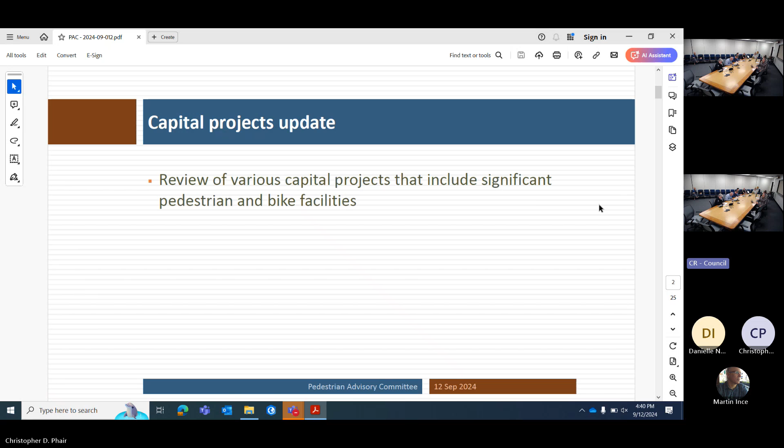All right, first one is the Lone Tree Overpass and Corridor. A lot of different components involved. It has a budget of $105 million and an anticipated construction schedule from FY24 to FY26. The project includes separated bike lanes on both sides of the overpass and roadway, and a FUTS trail on the west side. It includes a protected intersection at Butler and Lone Tree intersection.

And there are planned connections on the south and north to FUTS trails. The south would connect to NAU campus and the north to the future Switzer Canyon FUTS trail.

Quick question. At the last meeting, somebody talked about trying to acquire some land with a big gravel yard. Have they made any progress on that? I went and looked at it and it's a big piece of land. What you're referring to is one of the big holdups on the project, trying to relocate a light industrial facility, a concrete batch plant. It's on the city to find them an appropriate place to relocate to, and that's what has been holding the process up. As far as progress, I can't speak to any. Martin, any idea? No, I don't know.

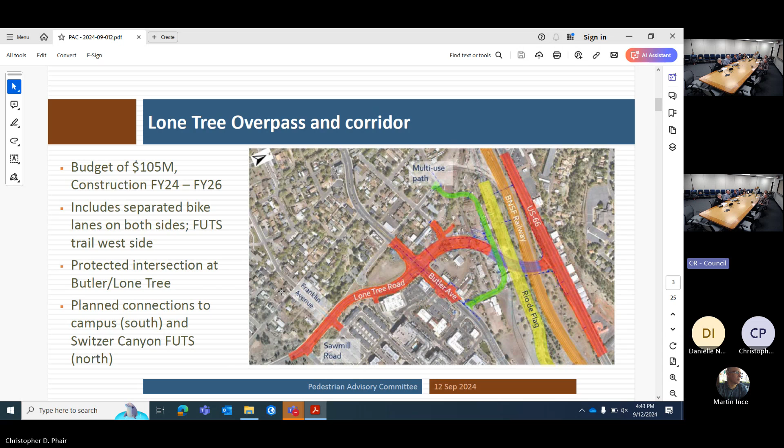So we could go across 66 and connect up to the Switzer Canyon Trail. Once that's in place, you can go all the way to Buffalo Park just by crossing two streets from that point. Going down south, that's a connection to the NAU campus. You can imagine how that will improve connectivity for people in those neighborhoods and going to campus as well.

Going back to when this was originally planned, we had talked to the Ped and Bike Advisory Committees about that trail because we were planning off-street bike lanes, which could replace the function of that trail. But there was interest in having that trail connect because of how it links to other trails in that area, keeping that link in place between Route 66, possibly Switzer Canyon, all the way down to campus. A bit further down, that solid orange line is the Sinclair Wash Trail, so in that part of town it forms a really nice connection between all of those things.

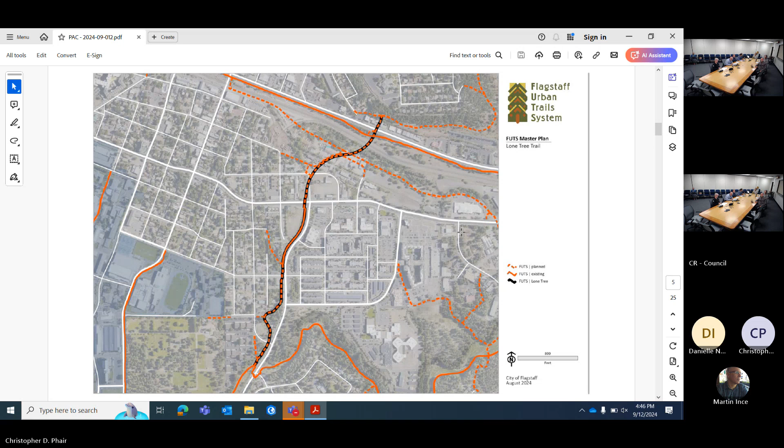Okay, next is the Butler Fourth Corridor improvements. This project has a budget of $16.4 million, with construction anticipated between FY24 and FY26. It includes separated bike lanes on the north and south sides of Butler Avenue.

Two roundabouts will be implemented, one at Herold Ranch Road, and one further east at Butler and Fourth. The one at Herold Ranch is being designed specifically to handle truck traffic because of the truck stop there, and we run into a decent amount of issues with conflicts from trucks trying to make a left off the south side. So this roundabout will force, with median islands as well, trucks to make a right out of that truck stop, go around this special roundabout to get back to the interchange.

And then another roundabout at Butler and Fourth. There's also the possibility of a tunnel for a FUTS trail at Butler and Fourth. The extent of the project goes from east of the I-40 interchange right to around where those truck stops are, and will extend east to the Sinagua Heights area, past the Butler Fourth intersection a ways.

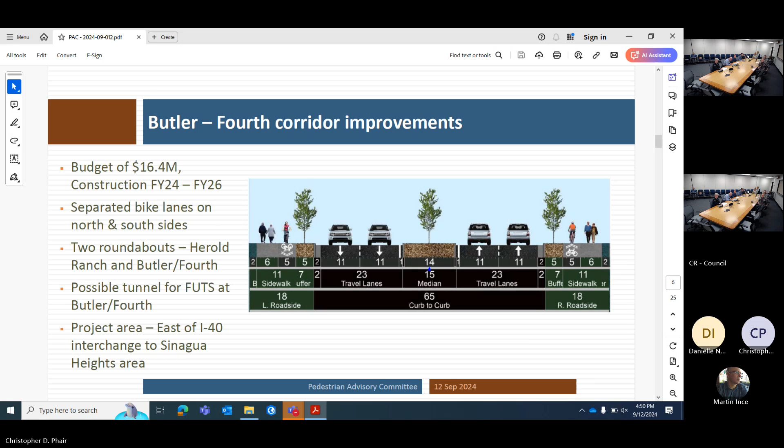It also includes separated bike lanes through the Milton underpass, and that's a big keystone of the rest of the project - expanding the railroad underpass that Milton Road goes underneath, adding a third rail and expanding the right of way beneath that. I think we have some more graphics to really exemplify that.

I think that the Rio de Flag underpass, the one downtown, the trail won't just end into the parking lot - it'll actually go around and end at the intersection of Phoenix. I just plan to drive there, park, and then take the trail. And that's the appropriate public park usage, yes.

I'm curious about this one and the Lone Tree Overpass - the Lone Tree Overpass does not depend on a BNSF stoppage, is that correct?

They're going to have the trains running the whole time, but for this project, it seems like them being willing to stop the trains for any period of time for construction is just... the schedules go on and on.

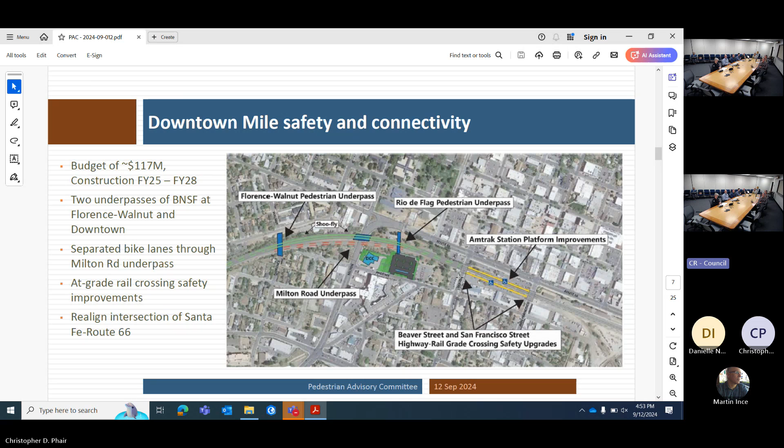And the bus people will be able to have better access to making their turns. They seem to have a lot of difficulty getting in and out of the Phoenix, on and off of Phoenix.

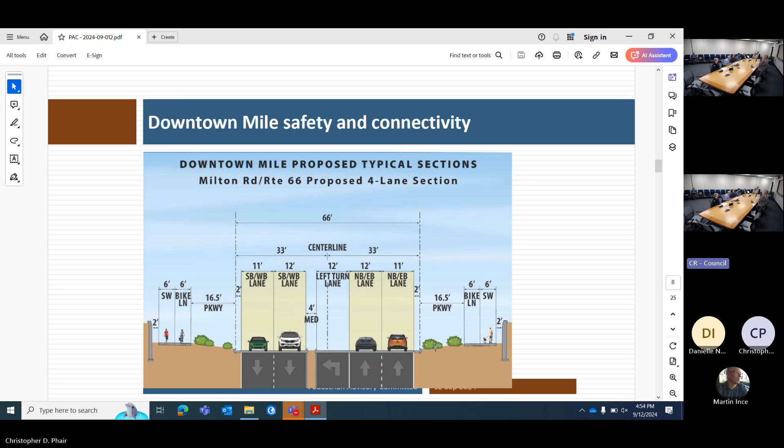Still TBD. I think they had argued at ADOT for a traffic signal at that corner, and the answer so far has been no, but that may not be the final answer - they may still be working that out. They're brave bus drivers.

So really the same issue that Mountain Line has with access in and out of Phoenix is not dissimilar to pedestrian and bike access. When you think about this stretch of 66, the closest formal crossings that are signalized are Beaver and Butler along that stretch.

This doesn't really improve that in that it doesn't introduce any additional crossings, but the two underpasses will help off to either side with getting pedestrian and bike access across the tracks into and out of downtown.

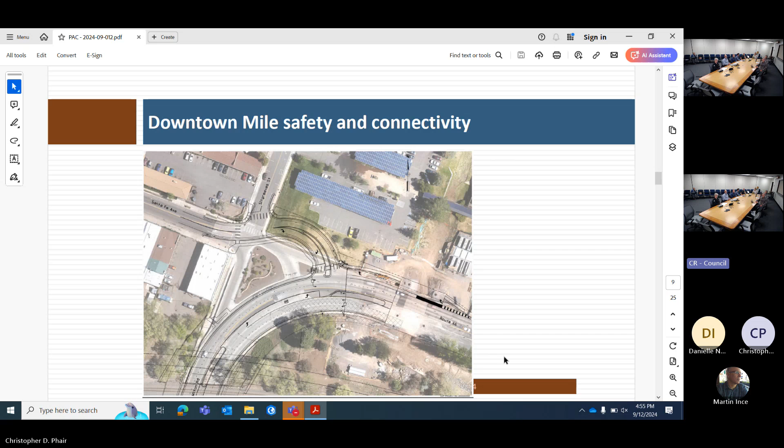All right, any other comments related to this one? Great.

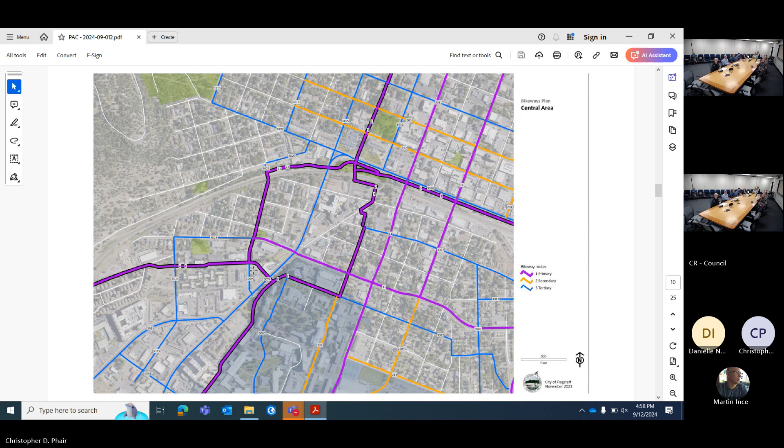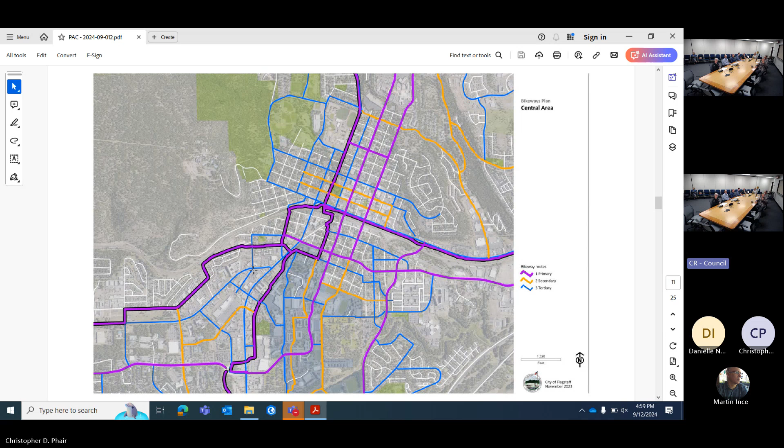This is just a bigger picture image of that same map, connecting all ends of the city, or attempting to connect all ends of the city.

All right, next project for discussion: the JW Powell Boulevard extension. This project has a budget of $45 million and a planned construction period of FY25 to 26, subject to change, I would add. The project extends from the existing end of JWP and heads east and ultimately north to connect with the Butler Fourth intersection at that south leg we were discussing before.

We're anticipating ped-bike edge improvements throughout the corridor, and there's a number of realignments related to the Arizona Trail that Martin will take us through.

So just to get oriented, this diagonal line across here is I-40, and toward the north end, this is Butler Avenue. Here's the interchange, here's the other project Chris talked about at Butler Fourth. So really we're talking about this whole area south of I-40. The main road through here is JWP, which connects from where it ends now by Pine Canyon, all the way through, and comes out at the intersection of Butler and Fourth.

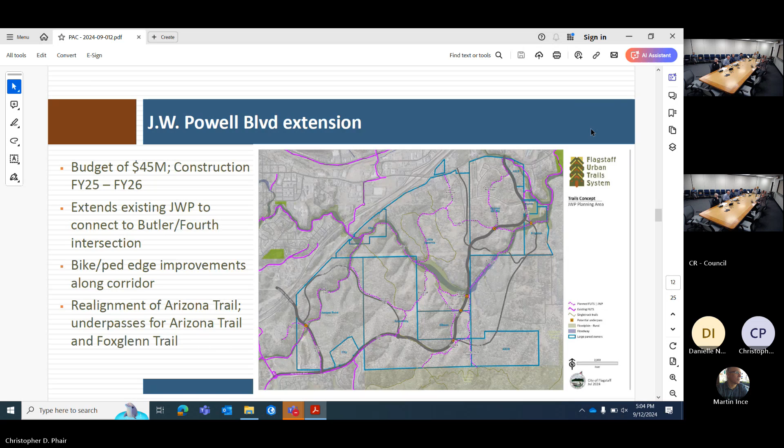Next project, the Rio de Flag flood control. This project has a budget of $122 million and construction is expected between 2025 and 2030. The project buries the Rio de Flag in multiple locations to mitigate and manage flooding in heavily impacted areas, especially through the core of the city.

The project will also work to extend the Karen Cooper Trail past City Hall to Phoenix and pave it as you head north towards Bonito.

A couple of interesting components of this project related to burying the Rio. As far as I understand it, it largely follows its current alignment, but they will dig up the existing Rio and put a big culvert box underneath with a closed cap. That is what will hold the big flooding events. However, they're still going to maintain what you'd call a spillway, where you can still see water when the Rio is flowing, but it's much more managed to maintain some of the character that it adds to the city.

Do you guys have any other comments related to that? Hopefully they'll make that culvert big enough. They're the engineers, they're sharpening their pencil. I hate to be... yeah, yeah.

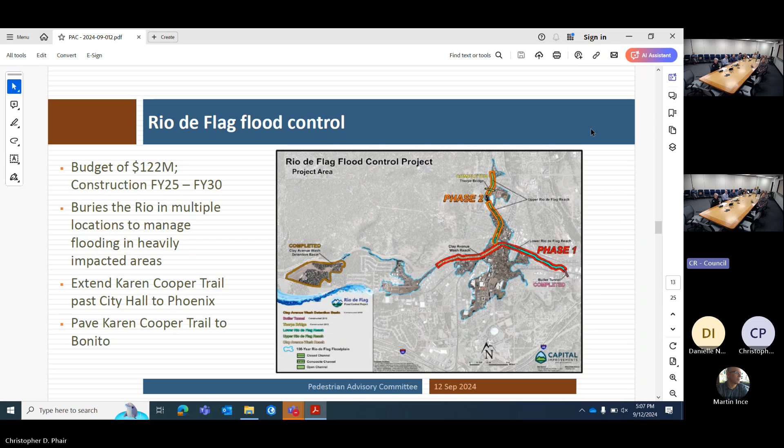Any other questions related to this one? Right.

Last one on our list for this agenda item, the Beulah University Roundabout. This project has a budget of $24.3 million and construction has been expected FY23 to 25. I'm sure we've all seen this ongoing work or been impacted by it.

The project provides separated bike lanes along the east and west side of Beulah, which you can see through this, how Beulah has been extended towards the north to reach this intersection. So separated bike and pedways on both sides, and raised pedestrian crossings at each leg of the intersection. Also of note is the pedestrian underpass of Milton Road, aligned right around this area, if you can see my cursor.

Halfway in. Yes, it is halfway. Yeah, it's going. Don't turn it back now. I hope not, yeah. Once you get past halfway, they're like, yeah, you gotta finish it now.

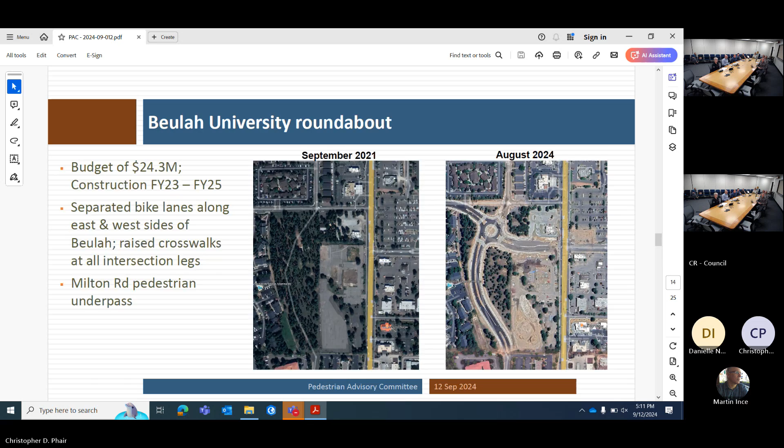Any other comments related to this? That's the end of that agenda item.

I know we've talked about these projects piecemeal over time, but we thought it was a good opportunity to bring them back and let you know the status, and give a refresher or update on what pedestrian and bicycle facilities we're planning as part of it. If you had to bet when that JWP to Fourth would be done, what year are we looking at? 2030?

Let's assume they start construction next year, probably the year after that, or the year after that. So next year is 25, so 27, summer of 27, optimistically.

Development's moving in that area aside from the Little America. Yeah, those guys will drive it faster than the city probably can. You look at what they're doing over there by Fourth, there's all new roads put in, you're like, oh, look at that, I'm sure they help pay for that. Cause only one side's developed, you'll see the developed side has all the bike stuff, the other side's just forest. They're like, yeah, I'm paying just this side, that's good.

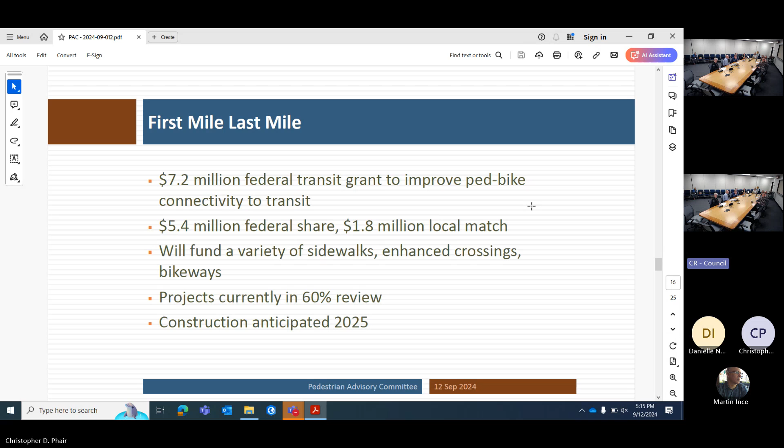What about the one? No one ever disagrees with that one. I was like, I just looked at that the other day in the morning. My God, what about the Lake Mary one?

There'll be another crossing. The first transit stop on Lake Mary is right across from the gas station there. Yes, so there'll be a crossing there. That is excellent.

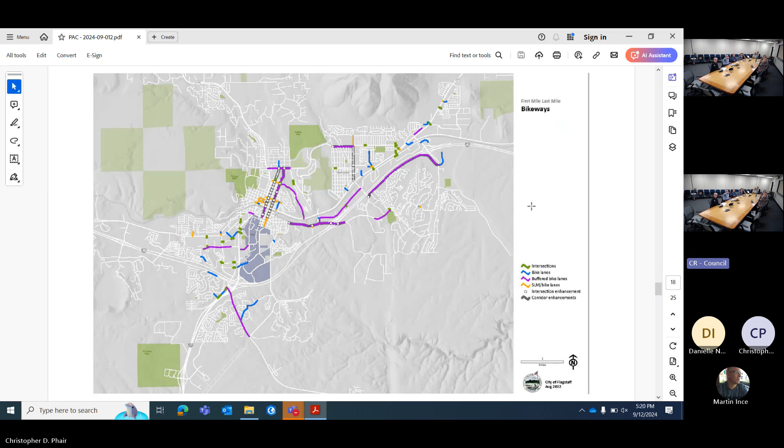The other one I think is maybe worth pointing out, kind of interesting, is Sylvia could be a buffered bike lane. If you go back to the crossings, we show enhanced crossings at every place there is a transit stop. I was wondering what those were connecting to. There's like 3 or 4 of them along Sylvia.

Yeah, it's not to give access to the interstate. No, it seems like there's a field there, maybe some wildflowers. So each one of those is a transit stop, and in this case the enhanced crossing would just be an island in the middle. There's room for that, Sylvia has a 2-way left turn lane that's pretty continuous.

And it's a useful bike route, which is why we identified it for potential buffered bike lanes. It's also a really fast street, and we're hoping that the islands and narrowing the feel of it through a buffered bike lane will help slow speeds. I know someone who ruled out that section of town entirely for moving there because it was just so miserable.

To try to get back and forth on a bike. So it'd be nice to have that place be open to bike commuting for normal people, not for the super commuters. I think this one will be interesting, how much it moves the needles for bicycle comfort and accommodation, because that's not one of our typical main bikeways in town.

But it could be really important for everybody who lives in that area. And further out, at the north end of the neighborhood, there's a lot of apartments, a lot of people. Yeah, because I ride out that way, but I have to go through where you're going to build those roads, just cobble together trails, private property. At night you get lost. Gas stations, detention basin, somewhere out there.

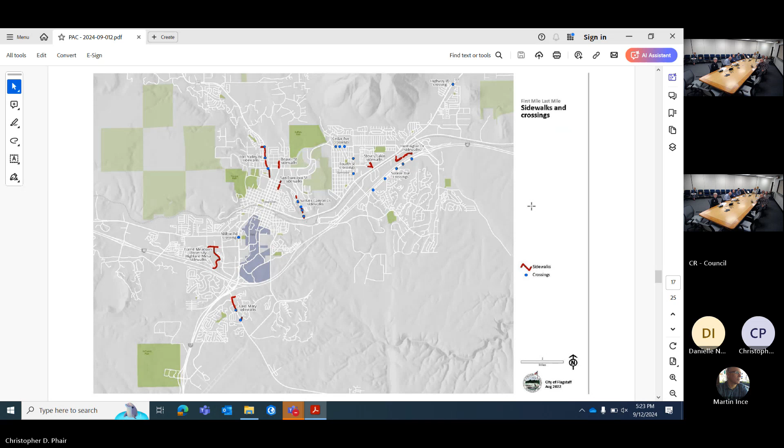Moving along, the Safe Streets for All Butler Avenue Complete Streets Conversion Project, one we've talked about many times before. In FY '23, the city of Flagstaff was awarded $9.6 million from the Federal Highway Administration to reconstruct Butler Avenue with complete streets design features. This includes separated bike lanes along both sides of Butler Avenue, from Milton Road to Sawmill.

Additionally, the project will enhance the existing RRFB crossing at Humphreys Street and Butler. As it stands now, the beacon lights are on the left and right sides of the road, but through the enhancements, it will install a mast arm so that the lights flash up directly over the tops of the roads.

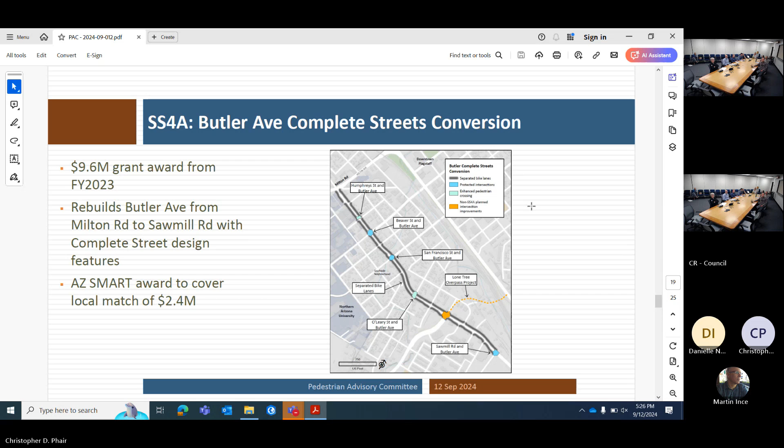Yeah, just a cross section of what will be typical throughout that project area. You can see separated bike paths, parkway space in between the roadway and the bike paths. What is subject to change depending on right-of-way constraints with this design is the parkway, which will be what gets eaten up. This right-of-way is 100 feet left to right, but there are some areas that are more constrained.

Now, the travel lanes, are they currently at 11 and 11 and a half, or are they going to get more narrow? It's a good question. Martin, I think that's pretty close to what they are now. They seem pretty narrow now. Yeah, that really works to slow people down, I think, at least me.

I think it varied depending on where you were, but they were as much as 12 feet through some sections, and with the original pilot barrier project, they got narrowed a little bit. So generally what's there now will match what will be there. And the extension of the curb, what is an on-street bike lane now will become the edge of curb. So it will work to make drivers feel a bit more constrained, and is a geometric change that could help slow people who are driving. Yeah, they don't see that open space.

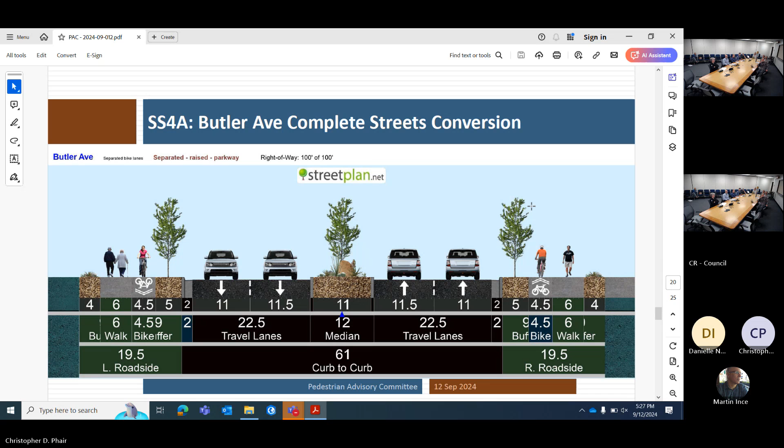We all set here? Right.

Next, the Active Transportation Infrastructure Investment Program, that's the name of the grant. The project is the Santa Fe Milton FUTS Bikeway. This was a fairly recent topic. The PAC offered a letter of support for this grant application for $509,000.

It would work to create concept level plans for 3 high priority projects identified in the ATMP. Those projects are the Santa Fe FUTS Trail Extension, which is this western leg that extends to the West Flagstaff neighborhoods. In this map, the green is the existing FUTS network, and the gold is this 3-legged project that would work to fill a missing puzzle piece of the active transportation network.

So ultimately, the Santa Fe FUTS Trail to the west, the Milton Bikeway which would extend down to the south, and then the Milton Road Ped Bike Bridge, which would span the two bikeways in question from the eastern end of the Santa Fe FUTS Trail across to the Milton Bikeway, across Milton Road, somewhat near the existing Jack in the Box to NAU campus on the eastern side of Milton.

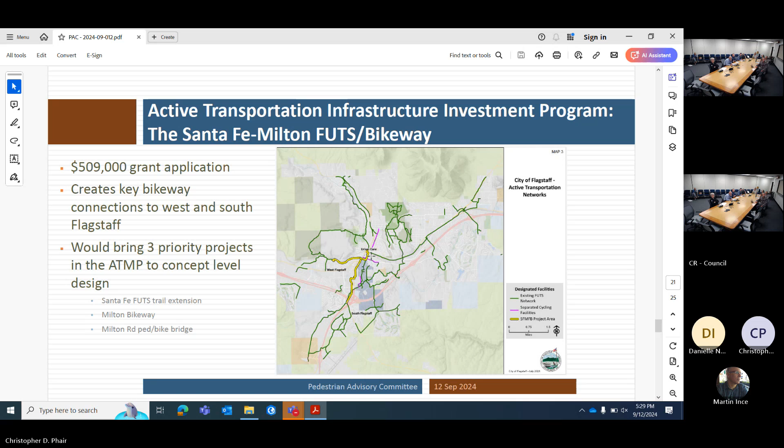Updates related to this grant: it was submitted back in July. Hopefully we will hear back sometime, somewhat timely. I'm anxious for this one, I had a lot of skin in this game. Yeah, hopefully by November or December we'll be likely to hear back on this one. Good. All right.

And then a few others: the SS4A Safe Streets Master Plan. This was an application put out earlier this year. Metro Plan, the city's MPO, led the effort on the application portion of this. Ultimately, the city had approximately $500,000 to $600,000 budgeted to create its transportation master plan, and to capitalize on available federal funding through this Safe Streets for All program.

Metro Plan suggested that we work together to leverage that $500,000 into more money. So we put out a $2.4 million grant application, and that was awarded. This plan, work is going to get underway on it soon. We're expecting to reach a grant agreement sometime in November. And I assume that it'll be a topic that comes back to PAC many times before it's done.

Otherwise, the Safe Streets for All amendment to the ATMP concept planning project, that was the most recent grant application that we submitted. PAC also provided a letter of support for this one, so we've discussed it recently. This would provide the city with a $1.7 million grant award, and it would allow us to get a contractor or consultant on board to bring a slew of our high priority ATMP projects to roughly 15% design, or to develop concept plans.

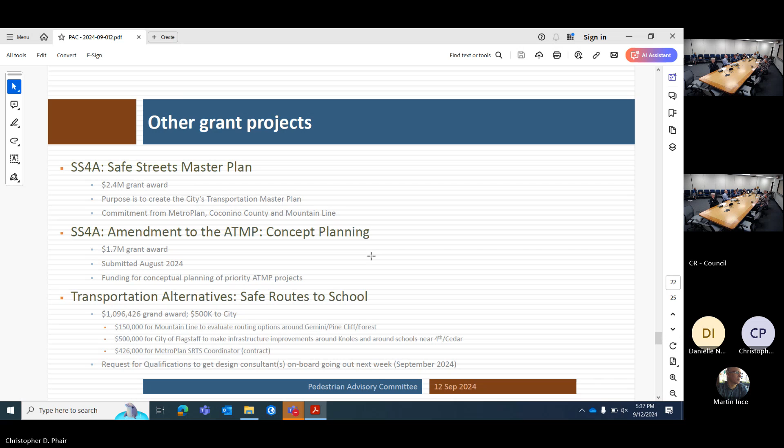Okay, moving on. The last in our triumvirate of updates is on safety studies. And here I'll turn it over to Chris again, but the theme is there's a handful of things going on at different levels: the city, the region through Metro Plan, and the state.

You'll be involved at various levels in all of these processes, and we're doing this to give you some context to see how all these things fit together and what their intent is.

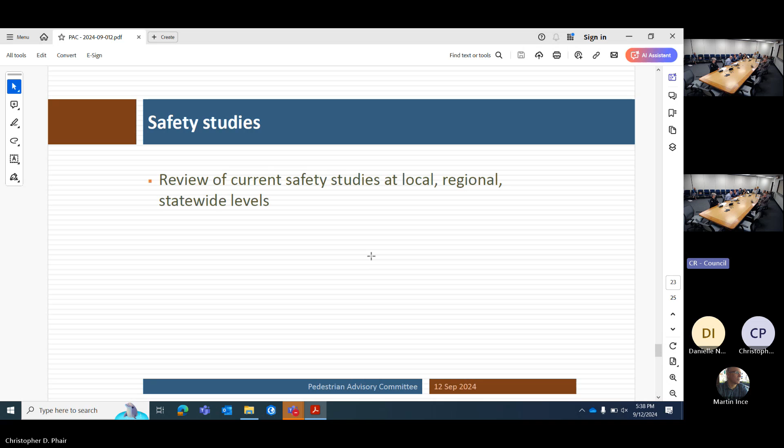Are you going to do this one? Sure, we don't really have too much prepared. I think it's really more to put these plans on your guys' radar. The links to all of these are available through the agenda as well. Different plans are at different stages as far as public input goes.

I believe that this top one, the ADOT Active Transportation Safety Action Plan, if you're interested in participating, now is the time.

It's currently in their draft phase, or their draft is published, and they're looking for public participation. It may be somewhat limited, the amount of time you have to do that, but it's certainly worth taking a look.

ADOT has launched a very widespread effort to get input from all around the state. I was able to attend a workshop that they hosted in Flagstaff, and there's a lot of interesting stuff going on through that one.

I guess one that I'm not as connected to is the ADOT Strategic Highway Safety Plan. I know that the AT-SAP is a supplement to the Strategic Highway Safety Plan, so those two kind of go together. Beyond that is the Metro Plan VRUSP.

Carlton and I got the lowdown on this one today. Metro Plan is up to some pretty exciting stuff. One of the big takeaways from my meeting today was that they're focusing on vulnerable users and the conflicts they experience, especially in areas that experience disadvantage around the city, to a very fine-tuned level. It's in its early stages, but definitely keep your eye on it.

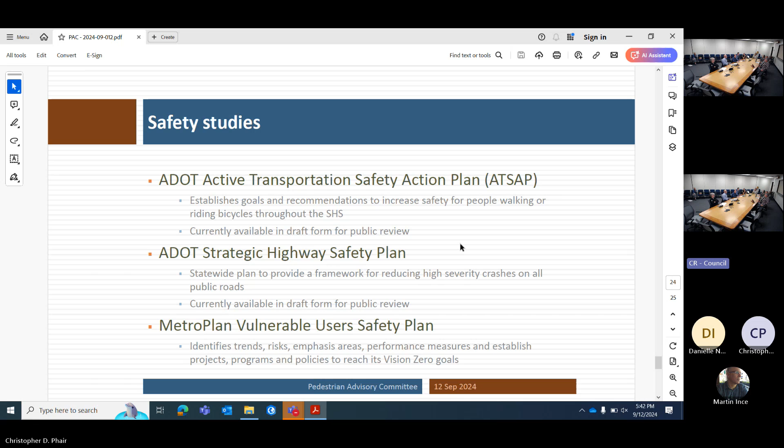La Plaza Vieja doesn't have enough influence on its census tract to trigger it to be flagged when you look at it on a lot of federal tools. So I think this VRUSP through Metro Plan is going to produce a lot of interesting stuff, especially as we continue to apply for grants where equity is at the center. It'll be a great reference point for us.

Beyond that is the Metro Plan Regional Transportation Safety Plan. This is also available online, and I encourage you to take a look at what they've come up with.

Beyond that is the City of Flagstaff Route 66 Highway 89 Road Safety Audit, or RSA. We've talked about this one previously. The City of Flagstaff late last year applied to ADOT's road safety assessment program to have their safety group take a close look at considerations along Route 66 and Highway 89, from Steves Boulevard to Marketplace Drive. There's a lot of traffic issues in that area, crashes between vehicles, and especially pedestrian related incidents.

That came up in the city's high injury network update last year, and the Transportation Commission requested that we take a deeper dive into that, and this program allows us to do that. It was awarded, we've met with ADOT, and there's a consultant on board to conduct the study. We've had our kickoff meeting, and now the ball's kind of in their court, but we've worked through some of the early details.

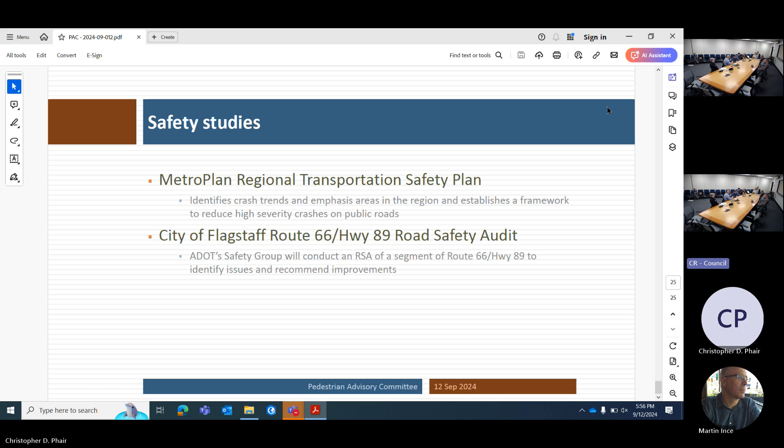May I ask a quick question before we conclude? I don't know if this is the appropriate time. Absolutely, sure. So I'm seeing 6 major road projects that are going to be either currently underway or underway within the next 5 years.

And inevitably, whenever you do these projects and start redirecting traffic, you have unforeseen or unintended traffic issues that arise. Probably the most common complaint we get is drivers going way too fast through construction zones, causing hazards for workers.

A prime example is Milton and University, currently under construction. Within a short amount of time after they closed that intersection and rerouted traffic with cones, we got multiple calls from city management and community members for officer presence because drivers are flying through these places. My main question is, with all these other projects happening, has any budgeting been set aside for off-duty traffic mitigation details for officers in those areas?